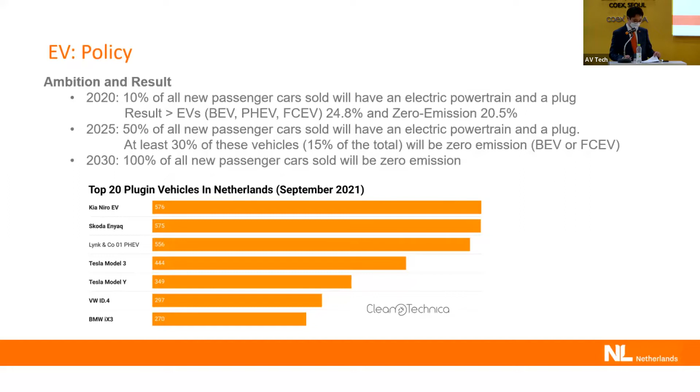네덜란드는 전기차 보급을 빠르게 늘리면서 산업도 발달하고 있습니다. 정부의 충전 인프라 확충이 국가적 중점 과제로 추진되면서 네덜란드는 지난해 말 전국 기준으로 6만 개 이상의 공공충전소와 15만 개 이상의 민간 충전소가 있어서 세계에서 단위 면적당 가장 많은 충전 인프라를 구축하고 있는 나라입니다. 이러한 노력은 점점 강화되고 있어서 작년에는 하루 평균 200개 정도의 충전소가 설치됐고 2030년까지 총 190만 개 충전소를 설치할 예정에 있습니다.

이 같은 적극적 투자를 바탕으로 해서 세계적인 충전 업체인 이위박스, 힐리옥스, 뉴모션 등의 충전기 제조업체들이 네덜란드에서 처음 설립되어서 성장하였습니다. 또한 다음 달에는 전기차를 ESS처럼 재생전기를 저장하고 다시 충전 시에 인센티브로 차량 보유자에게 주는 V2G, Vehicle to Grid 사업을 세계 최초로 네덜란드에서 시작할 예정입니다. 사진에서 보이시는 현대 아이오닉 5로 해당 프로젝트를 시작할 예정이라고 합니다.

네덜란드가 자동차하고 잘 연관이 안 되실 텐데요. 사실 네덜란드의 전기차 산업을 보시게 되면 먼저 테슬라의 유럽 조립 공장이 네덜란드에 위치해 있습니다. 그리고 유럽 내에서 한 16% 정도의 마켓 쉐어를 갖고 있는 트럭 업체 다프 트럭, 그리고 소형 버스에서 한 20% 정도 마켓 쉐어를 갖고 있는 VDL 등의 OEM이 이미 네덜란드에 있습니다. 그리고 여기서 중요한 것은 디젤 엔진, 유로 6 엔진들을 네덜란드에서 직접 생산을 하고 있다는 겁니다. 그래서 그런 강점을 갖고 있는 OEM들이 이미 네덜란드에 위치해 있습니다.

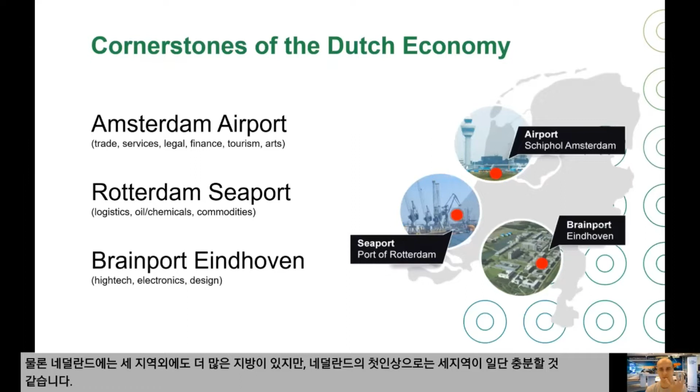As a third main port in the Netherlands, one of the economic hearts of our country, is Brainport Eindhoven, where high tech and electronics are developed - a real hardware focus together with software and developing high tech equipment, processes, and new technologies. So these are, in overview, the three main economic hearts and clusters in the Netherlands, but there's more in other regions - this gives a good first impression.

Important factors for this economy are companies like Philips and DAF that have invested in research and development from an early stage onward, creating a lot of spin-offs, many well known, like ASML leading in semiconductor equipment and supplying to Samsung in Korea, but also NXP making and designing chips themselves, and many other companies developing complex, low volume, high tech technologies. Next to these OEMs there is a strong supplier network that cooperates a lot with each other, which is really the Dutch way - to be open and social and cooperate easily.

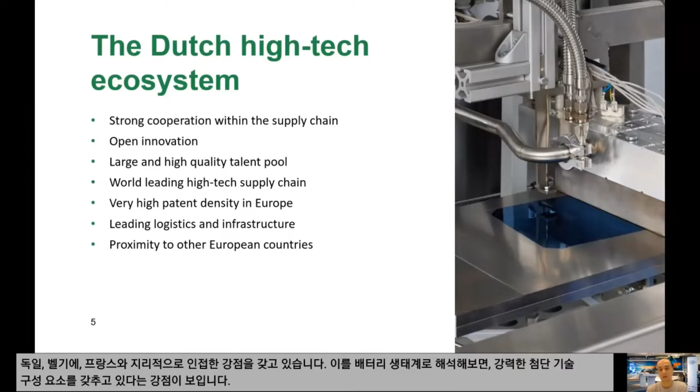To summarize, the Dutch ecosystem is high-tech focused, hardware and software in combination. We have an open innovation culture with strong cooperation in the supply chain, and also a leading tech talent pool with a very high patent density in Europe - we're really leading on that facet as well. We have a strong logistics infrastructure and competences, which is also beneficial with regards to our geographic proximity to Germany, Belgium, France, etc.

Translating this to the battery ecosystem, this strong high-tech component is reflected in what we do in the battery value chain, which on one hand is making end products that batteries are integrated in, like trucks, buses, and boats, and on the other hand developing new improved electronic and cell technologies, materials, and production equipment.

This is divided across several regions. In the west of the Netherlands we have a strong hub in the maritime sector, but also more heavy industry, as indicated earlier with Rotterdam, where recycling and material development takes place. There's also a strong research center at the Technical University of Delft on cathodes and solid-state electrolytes, with spin-offs coming from there.

More in the east of the Netherlands, we have a stationary energy storage cluster, where bigger stationary batteries are developed, and also a very strong research group on next generation battery cells. And not to forget, safety and test facilities are very present here, with a lot of test facilities and also safety and certification activities.

More towards the south of the Netherlands, we have the high-tech hub in Brainport Eindhoven, as mentioned earlier. This is in combination with a strong automotive industry, with DAF and VDL developing buses and trucks, but also a startup like LeydenJar present there, combined with thin film engineering for electronics and production equipment.

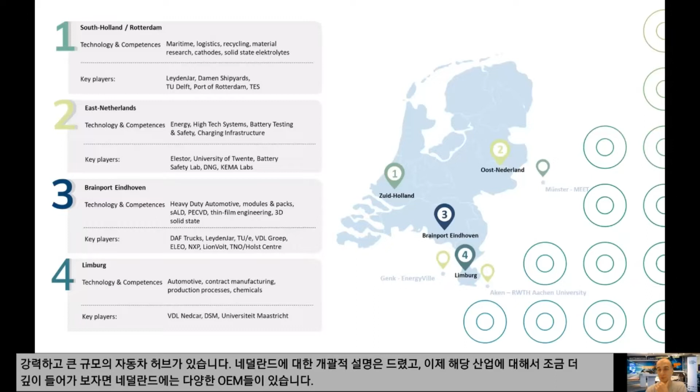So that gives you an overview of the Netherlands, but when we go a bit more into depth, we see that especially on the heavy duty segments, we have a lot of OEMs, developers of the end products, for example VDL, DAF, and Damen, but also Spierings mobile cranes, developing mobile cranes, and even a leader in Europe with regards to electric mobile cranes.

So this is a focus also of the Dutch way of developing batteries, focused on these specific applications. And we're also a leader in inland maritime solutions, so that comes in well in making the transition from combustion engines to electric solutions.

If you then look at our supply chain of battery technology, we see that there's no large-scale lithium-ion gigafactories, not as in the other countries in Europe, but we focus really on new and improved battery technology.

Both on the materials, as you see with silicon anodes and lithium sulfur being developed by companies like E-magy and LeydenJar, as well as a totally new structure of the cell with Lionvolt developing a 3D structure for solid state cells, which is really unique.

And then we have also a strong set of production equipment and processes companies like SALDtech and SALD, but also Delft IMP will be presenting after me as well.

And these cooperate with a strong set of corporates. So it's not just the startups, but it's a combination of corporate companies with strong leverage in the semiconductor industry mainly, together with a strong set of startups and scale-ups that have specific competences. And together we want to make sure that these scale.

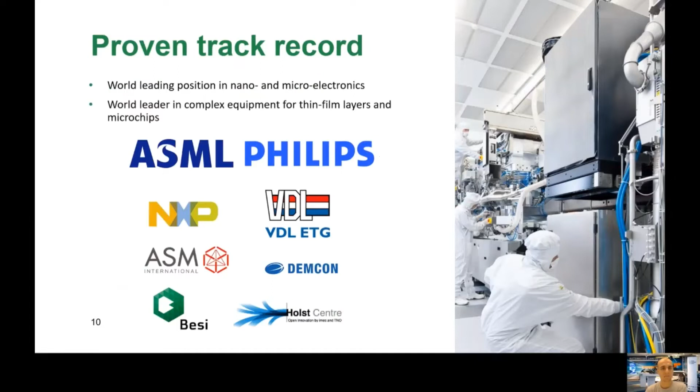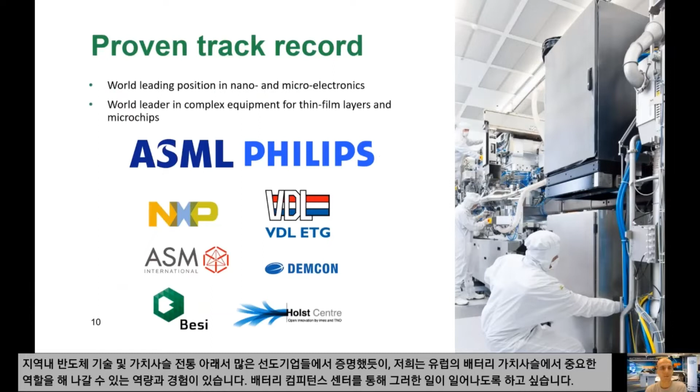As said, we believe that through the semiconductor heritage, where we have really leading players and a leading supply chain, we have the leverage and track record to play an important part in this battery value chain in Europe. And we want to make sure that happens through the Battery Competence Center.

The Battery Competence Center is an innovation program where companies, knowledge institutes, and the public side come together to develop the knowledge and competences needed to create this Dutch position in the battery value chain. We do that, for example, through business development, but also being a platform for all the companies, both national and international, to get access to this Dutch battery value chain.

So really facilitate the growth of the ecosystem, but also want to position the Dutch battery value chain as we're doing today. We do that focused on 3 themes. So this is our strategic focus of the Netherlands.

So here we have battery systems. We want to make sure that we develop and produce the modules and packs in the Netherlands for these specific applications as shown before. So really niche and heavy duty focus. That's different than other countries where the focus is on personal vehicles.

We do that in a circular way, of course, and we want to make sure that we have the startups and companies that make new materials and equipment ready for scaling in the future. And then we can integrate these 3 and we have a real integrated successful value chain in the Netherlands, which is quite unique.

Well, what are we looking for with regards to collaborations? We're really looking to connect to cell suppliers, but also innovative battery companies to collaborate with us on these 3 themes, right? So module and pack development and getting access to the best cells for that.

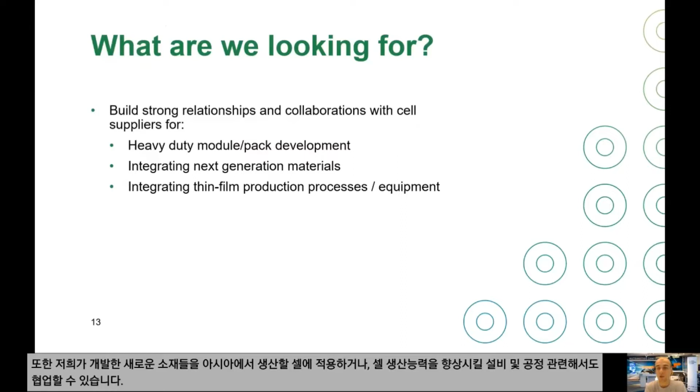But also integrating our new materials in the cells that are developed in Korea or in Asia, and also working together on developing production equipment that can improve the production of these cells.

So key takeaways, this is a summary. We're an OEM neutral country where we don't have a leading big OEM in the automotive industry, so that's also beneficial towards being located here as a company. We're a front runner in e-mobility and applying those, especially in the heavy duty segment.

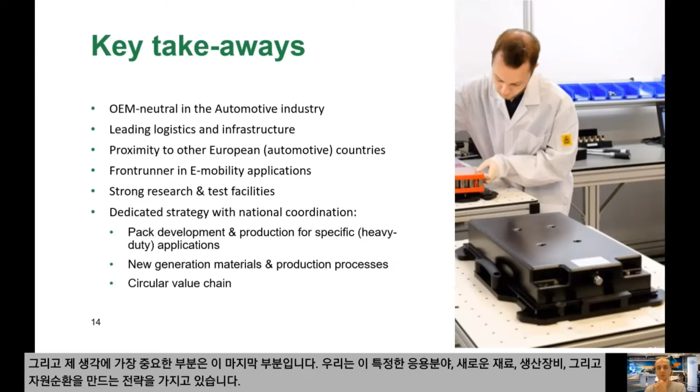But I think the most important part is this last bullet where we have the strategy, Dutch ecosystem, really on the specific applications, on new materials and on production equipment, and of course doing that in a new circular way.

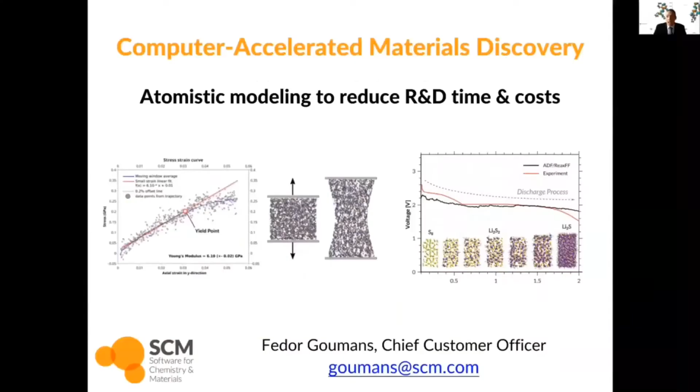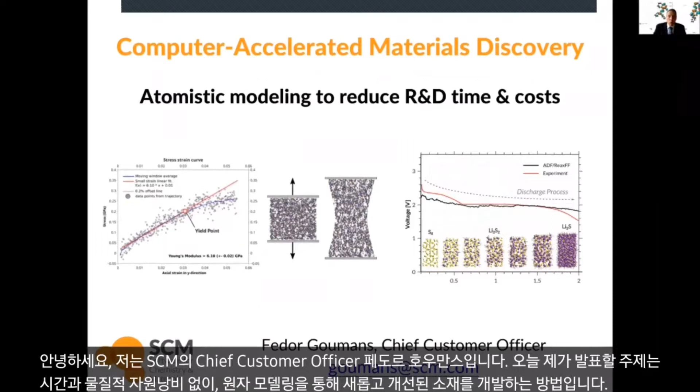Let's talk about how atomistic modeling can help you develop new and improved materials more quickly without using as much wasteful resources. Materials modeling is a proven method to help you understand and predict materials properties, screening many different types of materials before going to the lab and focusing only on the materials that have the most promise for the properties you're interested in. We can do that for many different types of materials because ultimately we can simulate material properties at the atomistic level, helping us predict, understand, and improve material properties.

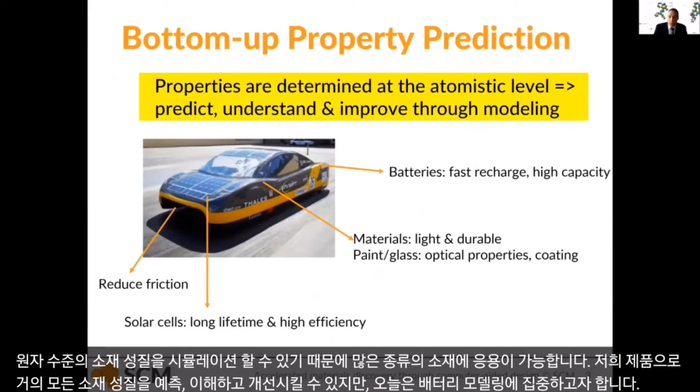But let's focus on battery modeling here. Our company, Software for Chemistry and Materials, is based out of Amsterdam. We've been around for 25 years. Originally, the software was developed as a pragmatic tool to understand inorganic chemistry with a particular application to catalysis. But this can be applied to many different problems, including batteries.

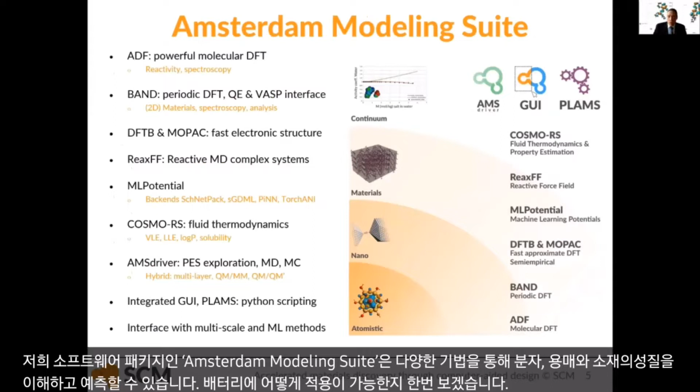Our software package, the Amsterdam Modeling Suite, has a range of different methods that allow you to understand and predict properties of molecules, solutions, and materials. Let's see what can be done for batteries.

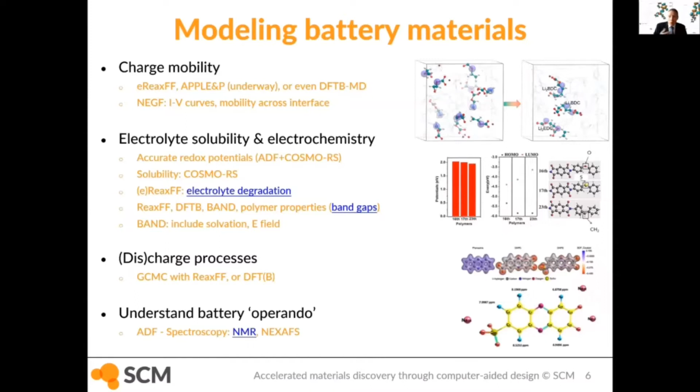We can calculate charge mobilities, diffusivities, redox potentials, and we can also look at what's happening in the battery under operation mode, what happens during discharge processes, when we charge the battery. Maybe we want to quickly screen many different types of electrodes and see which one has the best properties for a battery stack. Maybe you can also look at what is happening at the electrolyte interface and understand the processes there to get a better understanding of how we can get the best battery under operating conditions.

Some groups also use the software just to get a better understanding of what is happening in the battery by matching experimental observations, typically spectroscopic techniques like NMR and X-ray absorption spectra. So we can see the battery during operation and understand the interactions taking place, which again can help you develop better battery stacks.

So there's a few examples here where people have been looking at redox potentials and NMR spectra, as I mentioned, that gave researchers, in this case at PNNL, an American government lab, better insight into how to make aqueous redox flow batteries. And some of these materials now have been patented.

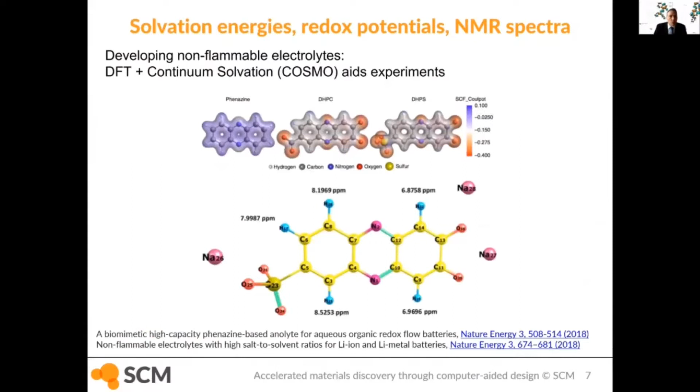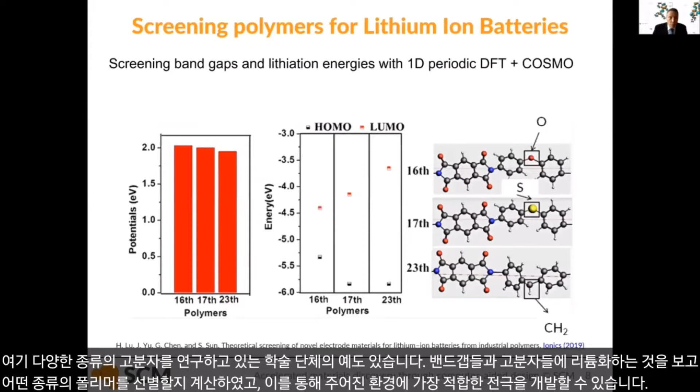But let's look more deeply into the battery itself. Of course, we're interested in what's happening during discharge processes. For simple lithium batteries, for instance, we can look at lithium discharge processes during operation, and we can understand why, at high discharge velocities, the lithium ions can start to attack the electrolyte, leading to unwanted breakdown and perhaps even buildup of gases.

In this particular study from some 7 years ago, they found out that if you put in a layer of Teflon, which is an inert material, the lithium ion, as soon as it leaves the anode, will collide with it and slow down just enough that it will not really decompose the electrolyte anymore, but still fast enough that ion mobility remains high enough for good conductivity.

Similarly, you can look at the processes at the electrolyte interface and see how the solid electrolyte interface is being formed during the first discharge processes.

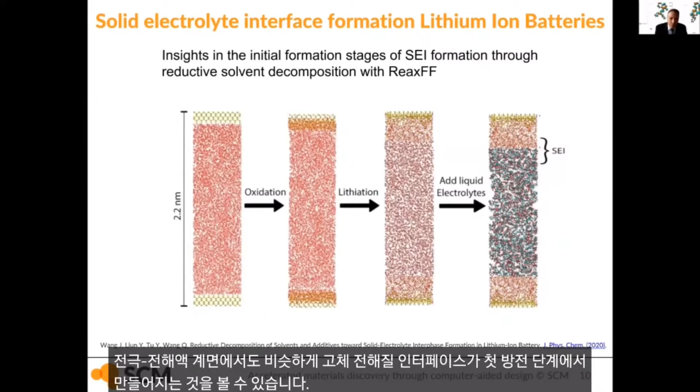We can also look at how, in this case, the cathode expands for a lithium sulfur battery. So when we go all the way from a fully charged to a fully discharged battery, we can see what is happening during the lithiation process, see how the cathode expands, and that helps us to take good care that we design a battery that can account for this expansion without breaking the material.

So let's see if we have a little video that demonstrates what's happening there. We can see as the battery starts to discharge, we get more lithium ions in our sulfur cathode. We get slow expansion, as you can see here, until eventually the battery is completely discharged, leading to a considerable expansion of around 10% in the sulfur cathode.

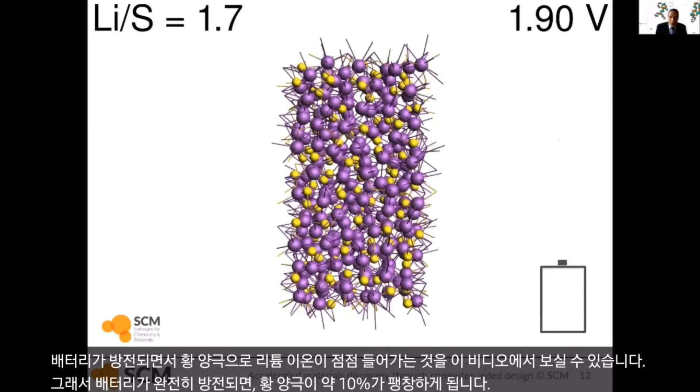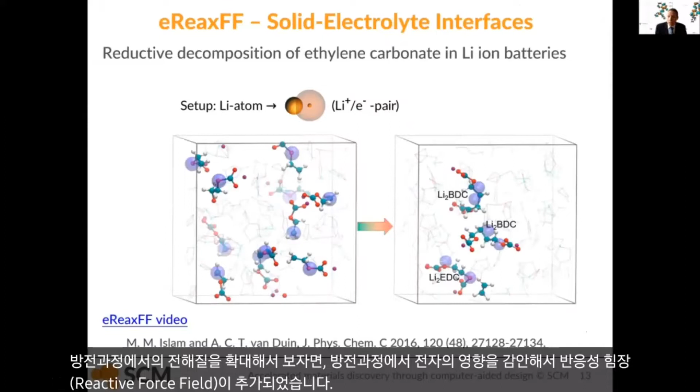Okay, so if we zoom in on the electrolyte during the discharge processes, electrons play a role as well. This has been recently added to a reactive force field, which can also take into account the effect of electrons during discharge processes.

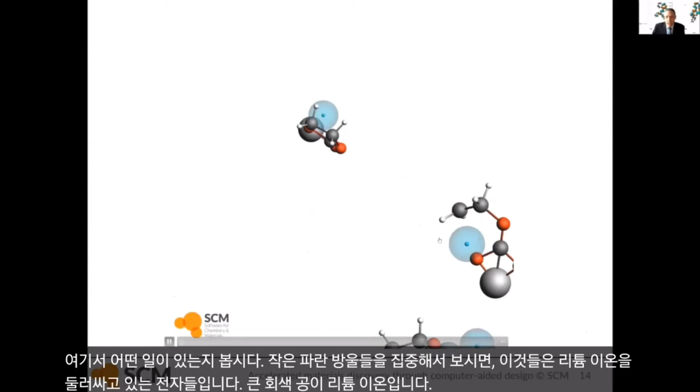Let's have a look at what's happening. We focus on these little blue blobs here - these are the electrons surrounding the lithium ion. This big gray ion here is the lithium ion. You can see that the electron in some cases can start to dissociate, in this case the carbon-carbon bond, carbon-oxygen bond in the ethylene carbonate, leading to dissociation of the electrolyte.

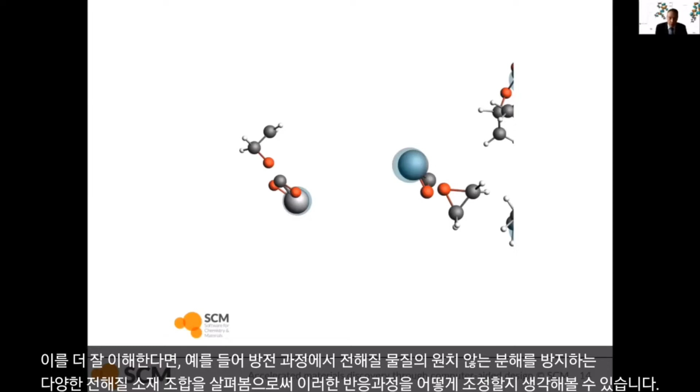So again, getting insight into the processes at the very small level, the atoms and the electrons. If you have a better understanding of that, you can think about how to steer those processes, for instance by looking at different electrolyte combinations that prevent unwanted breakup of the electrolyte materials during the discharge processes.

Ultimately, we want to go to larger scales, so we need to swap between these different scales. We have a collaboration with an American company, Wasatch Molecular, that developed polarizable force fields that allow you to study even larger systems of millions of atoms, and ultimately take that to the mesoscale using a coarse-grained approach. The polarizable force field is a proven way to get good diffusion and conductivity specifically for ionic systems, as they are in batteries. With that, we hope to get a larger view of the battery processes, going all the way from the atomistic to the mesoscale.

Finally, if we go all the way to the larger scale, we can do continuum modeling of fluids using a specific model, conductor-like screening model for realistic solvents, or COSMO-SAC, which stands for segment activity coefficients. This method can be used, for instance, to screen solubility.

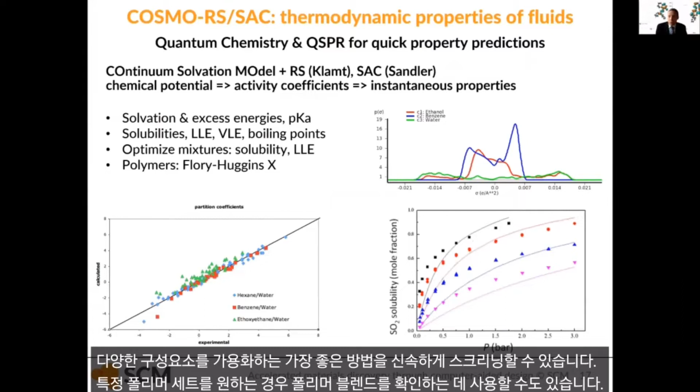So if we have a particular electrolyte and a particular set of co-solvents that we want to use, we can use this method to quickly screen the best way to solubilize the different components by using adjuncts as well. It can also be used to look at polymer blends in case you want a particular set of polymers.

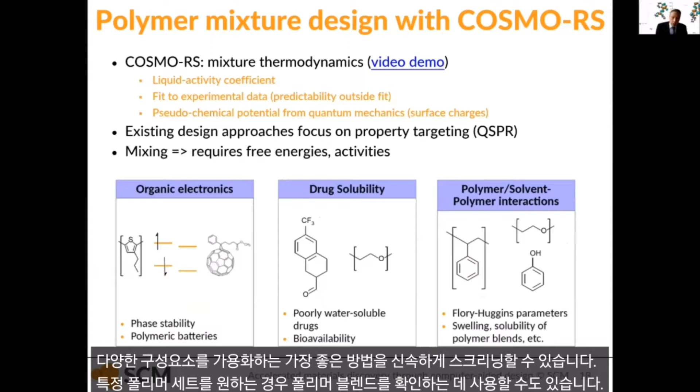And finally, let's talk about how we can take this even further by incorporating machine learning. Experiments are very expensive. Quantum chemistry or MD simulations are less expensive, but still sizable in terms of time and costs. Then there are machine learning techniques, which once we have a model, are really fast and quick, so we can screen many different types of compounds.

However, typically this is not accurate enough, or it takes months or even years to train these types of models. So in a new collaboration with Kebotix, an American-based company, we're going to combine their expertise in machine learning and deep learning techniques, their expertise in employing robotics to take into account experimental results, and our quantum chemistry and molecular dynamics expertise.

By using those combined expertise, our aim is to get to screening at a reasonable level of accuracy, much higher than probabilistic machine learning techniques, getting the accuracy of quantum chemistry, but now being able to screen millions of compounds. This is going to completely make it feasible to screen many different types of compounds at a reasonable cost before going to the experiments.

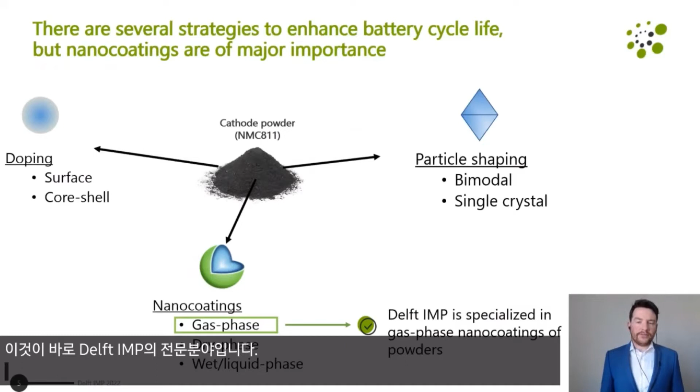They compared the impact on cycle life for the different coating methods. Among those, gas phase coating showed the best enhancement in terms of cycle life.

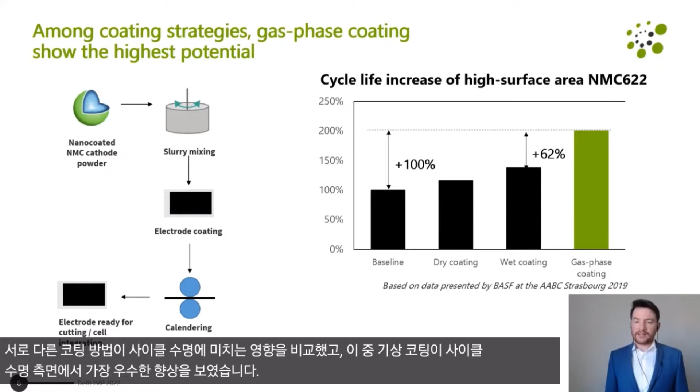During each cycle, you introduce a molecule from the gas phase that can only react once with the surface. The excess gas gets removed and you introduce a second molecule that again reacts with the surface. By doing this, you have a very good control of the coating thickness. It allows you to coat the surface of complex structures such as powders.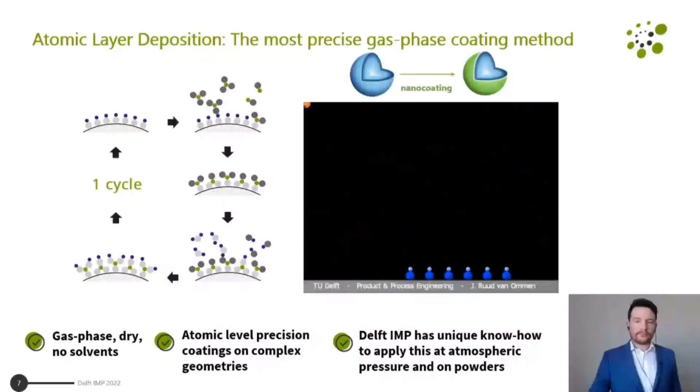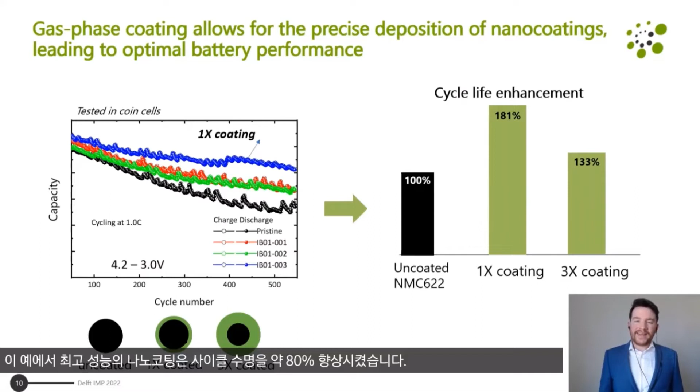Here, you can see an example where we can precisely control the thickness of the coating. By testing performance in coin cells, we can extract the optimal coating thickness. In this example, the best performing nanocoating led to about 80% increase in the cycle life.

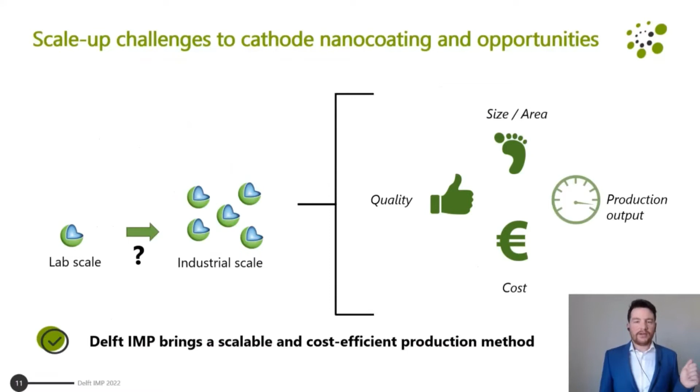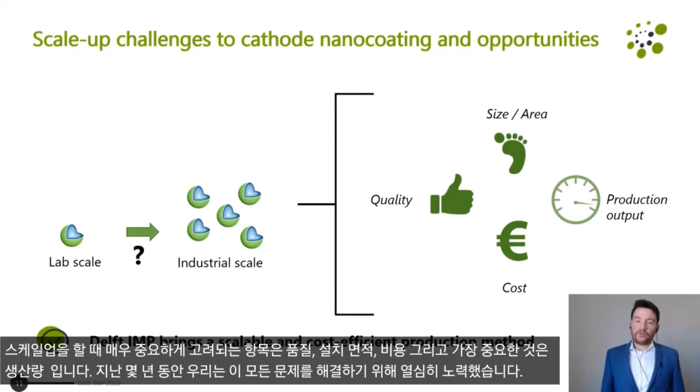I hope that in the previous slides I managed to convince you that gas phase nanocoatings have tremendous potential. The big question is, how can we produce this at an industrial scale? There are different aspects that become very important when scaling up, which is quality, area of the installation, cost, and of course production output. In the last couple of years, we have worked very hard to solve all these problems.

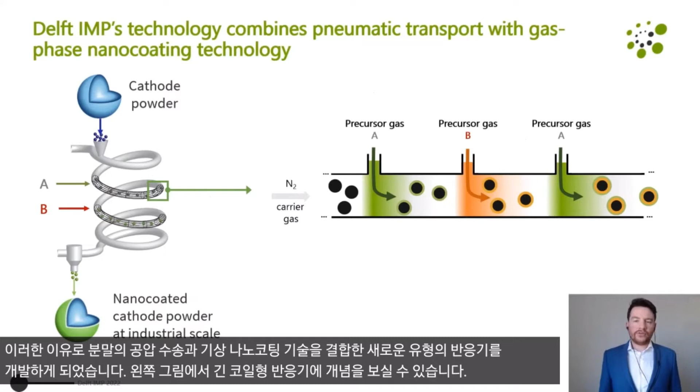For that reason, a new type of reactor was developed that combines pneumatic transport of powders with gas phase nanocoating technology. On the left, you can see the idea is based on a long and coiled reactor.

A powder gets injected from the top and flows through the reactor. While the powder flows through, it reaches different reaction zones. Each reaction zone will add a small amount of coating.

By controlling the size of the pipe, we can increase the production throughput. By controlling the length of the reactor, we can control the final thickness of the coating. This reactor concept is ideal for continuous production at industrial scale.

Using our reactor has several advantages. First, we have already shown that throughput up to 10 kg per hour is possible. Later this year, our reactor will be ready that can process up to 100 kg per hour of powder. This should be sufficient already for a pilot production line. It will be straightforward to further enhance the production capacity after that.

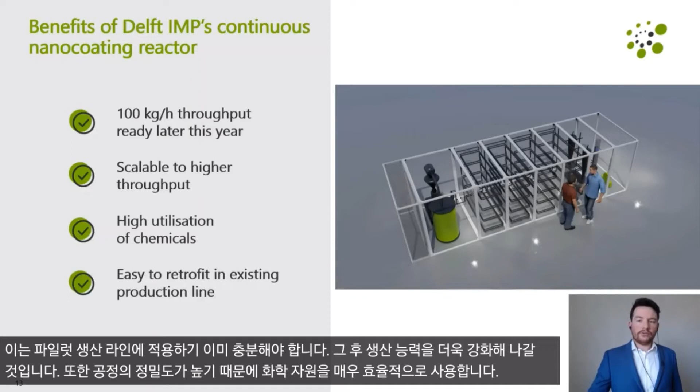Also, because of the high precision of the process, we are very efficient in the use of chemical resources. Finally, due to the relatively small size of the system, it could easily be retrofitted in existing production sites. Here you can find a 3D model of our 100 kg per hour system.

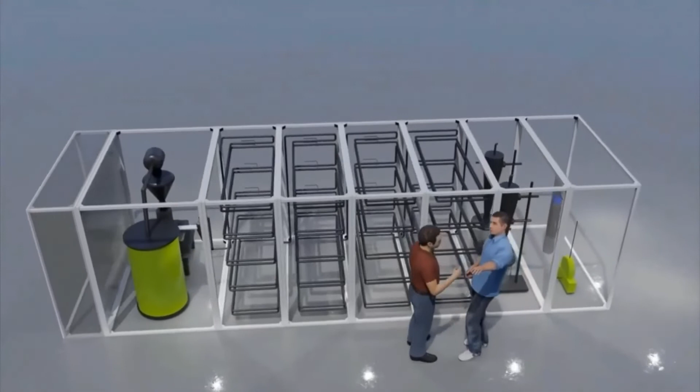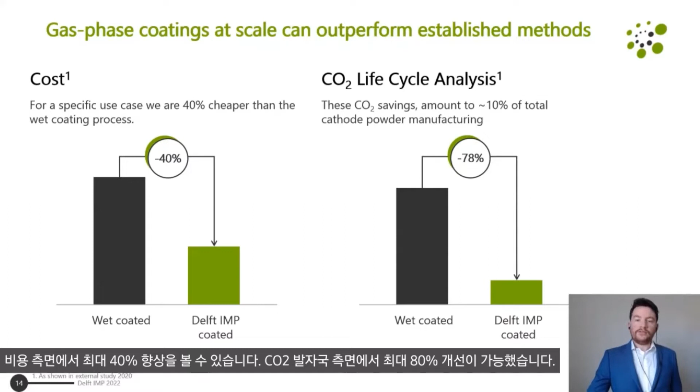In terms of cost, up to 40% enhancement in cost can be seen. In terms of CO2 footprint, even up to 80% was shown.

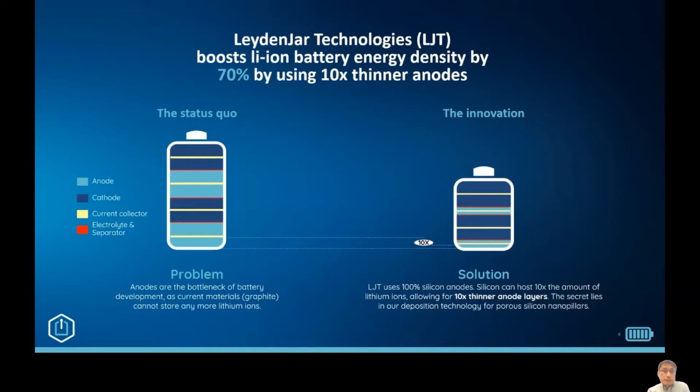현재는 캐파가 낮습니다만 현재 개발 중인 설비가 풀 가동한다면 연간 35메가와트/아워에 상당한 실리콘 음극을 생산할 수 있습니다. 갤럭시 S22 울트라가 용량이 5Ah인데, 35메가와트/아워는 S22 울트라 200만 대에 해당하는 양입니다.

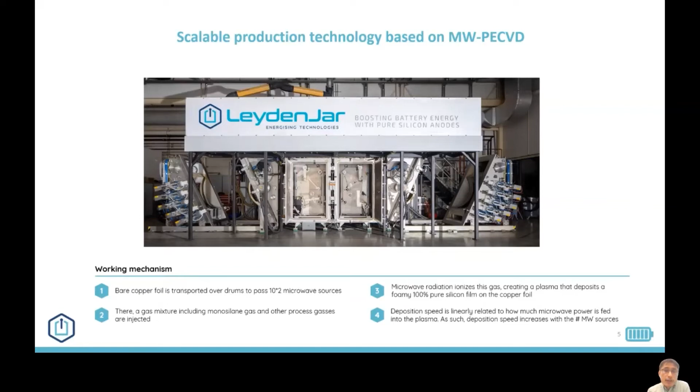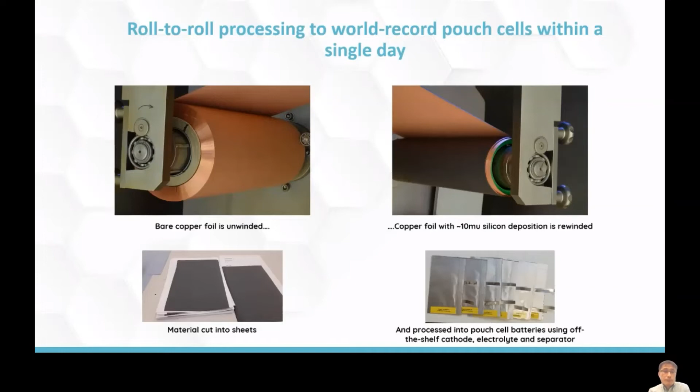저희 프로세스는 기존 음극 공정을 통째로 대체하는 공정입니다. 슬러리 믹싱, 슬러리 저장, 건조, 압연, 진공 건조가 저희 PECVD 공정으로 대체가 됩니다. 믹싱 공정은 가스 공급 설비로, 코팅·건조·압연은 증착 설비로 대체됩니다. 저희 공정 자체가 드라이 공정이고 진공에서 진행되기 때문에 별도의 진공 건조는 필요가 없습니다. 따라서 로지스틱이 극단적으로 간단해지고, 관리해야 하는 공정 조건이 두 손으로 셀 수 있을 수준으로 단순해집니다.

독일 P3 그룹에서 분석해 주신 바로는 연간 5GWh 생산 수준의 스케일에서 레이덴자 음극 제조가 마켓에서 요구하는 코스트를 맞출 수 있습니다. 참고로 2028년 마켓에서 음극 제조 공정에 원하는 코스트 수준은 킬로와트아워당 16유로로 전망된 기준입니다. 기본적으로 실리콘은 지구에서 구할 수 있는 가장 많은 양의 원소이고 저렴합니다.

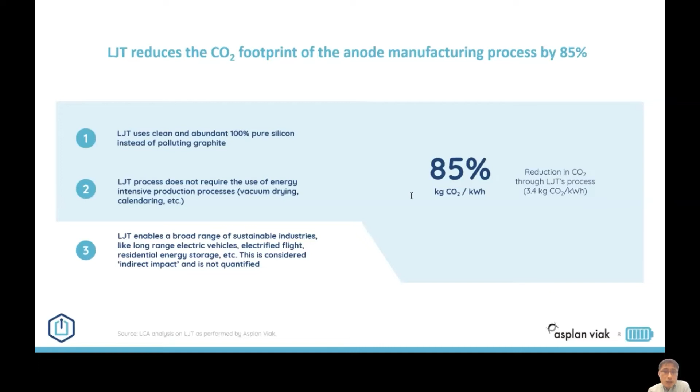마이닝부터 OEM까지의 서플라이 체인 중에 발생하는 부가적인 효과는 이 분석에 포함되어 있지 않습니다. 결과적으로 레이덴자 기술은 No Greenhouse Gas Emission이라는 인류 지상 목표에 가장 근접해 있는 기술입니다.

조금 전에 말씀드린 1350Wh/L는 NMC 622를 기준해서 얻어진 에너지 밀도이고요. NMC 811 혹은 더 고용량의 양극 사용, 실리콘의 로딩 증가, 실리콘 이용률 증가 등으로 1700Wh/L 이상으로 에너지 밀도를 더 증가시킬 수 있습니다. 이 1700Wh/L는 리튬 메탈 전지에서 얻을 수 있는 수준을 훨씬 상회하는 수준입니다.

이런 초고에너지 밀도보다는 향상된 배터리 수명을 더 원하신다는 피드백을 여러 고객사로부터 받아서, 초고에너지 밀도보다는 현재 수명 특성 향상에 더 전념하고 있습니다. 초고에너지 밀도에서 더 심각하게 우려되는 배터리 안전성 문제를 잘 인지하고 있고, 초에너지 밀도 달성 프로젝트에서는 안전성 강화 목적으로 All Solid State 배터리 개발을 진행할 계획이 있습니다.

레이덴자 테크놀로지 기술 현황과 전망입니다. 500사이클에 집중하고 있고, 현재 데이터 기반으로 말씀드리면 400사이클에 근접해 있습니다. 말씀드린 것처럼 초고에너지 밀도와 레이트 캐퍼빌리티는 계획보다 조금 늦게 진행되고 있습니다.

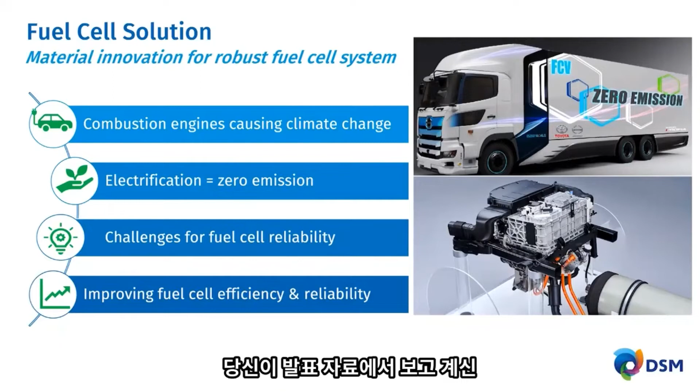I'm glad to say that the automotive industry does have one solution that will help, which is the electrification of the powertrain in transport. That means zero emission.

In general, there are two alternatives in powertrain electrification: the lithium-ion battery and the fuel cell. The fuel cell is an emerging technology, because it is a technology with minimum environmental impact.

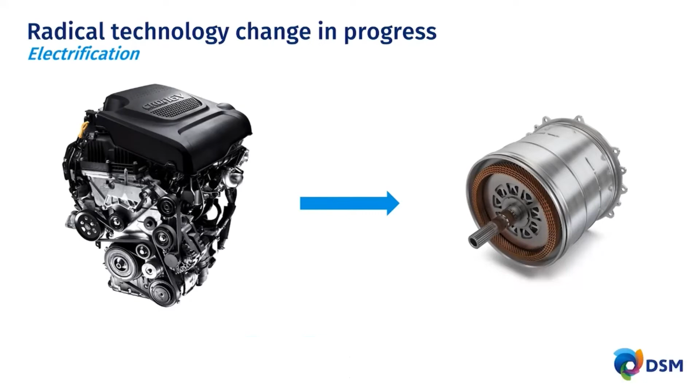So how does this promising technology work? The heart of the fuel cell is an electrochemical process, which combines hydrogen and oxygen and converts it into electricity.

and water. A catalyst and a membrane have to be applied to make the process happen.

The principle of the technology may sound simple, but in fact, it is a delicate technology, and its durability and efficiency can be easily and significantly jeopardized.

the fuel cell stack, which is the heart of the electricity generation.

In most of the time, the fuel cell system works between 70 to 90 degrees with almost 100% humidity at a pH value around 5.

Those conditions may sound moderate, but in reality, it is harsh enough for the material utilized to construct the fuel cell system.

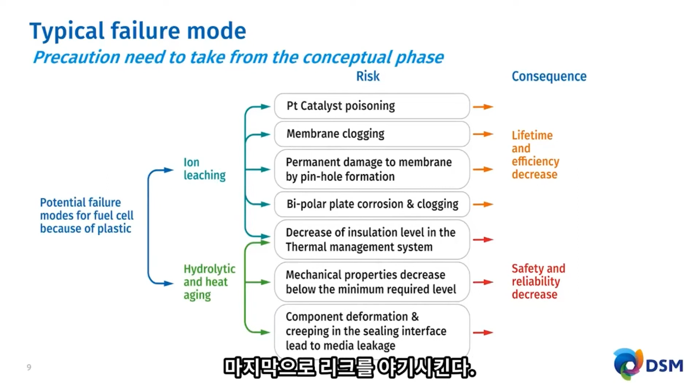with the platinum catalyst and form a masking layer which blocks the hydrogen from reacting.

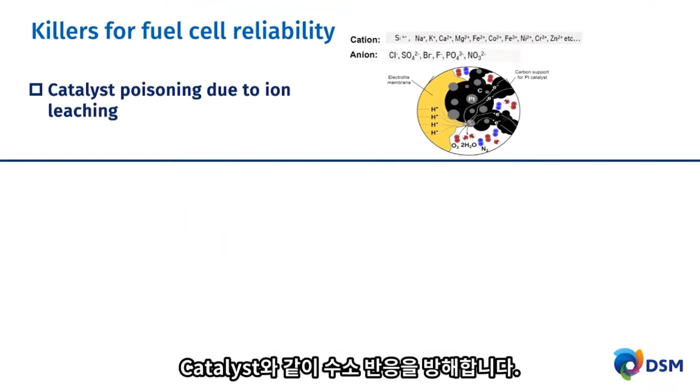And the second significant impact comes from the presence of ions, especially the cations, in the membrane.

It will cause membrane clogging, and also, in the worst case, it causes membrane degradation as pinhole formation.

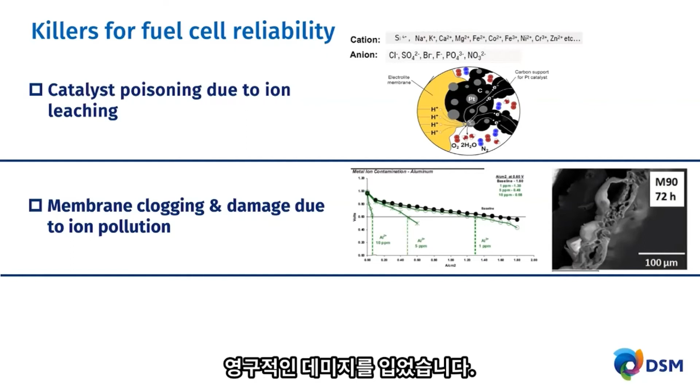The third, but not the last, significant impact is the degradation of the material in the hydrolytic environment, which causes part deformation, especially if the deformation happens in the sealing interface.

It causes medium leakage, which will lead to the fuel cell system functioning in the wrong way.

If those problems are not foreseen and solved in the design phase, the lifetime of the fuel cell engine is jeopardized. So our team has made a breakthrough technology which helps boost lifetime over 20,000 hours.

It is able to meet the most critical requirements in all kinds of transport forms.

Plastic compounds used to build the fuel cell engine will have to be loaded with additives, such as glass fiber, to meet the required strength.

It is similar to the steel bars we use in concrete to construct our houses.

As mentioned, the fuel cell works in a fully moisture-saturated condition and operates at 90 degrees. Such conditions are harsh enough to break the bonding of the glass fiber and the polymer matrix, which causes problems

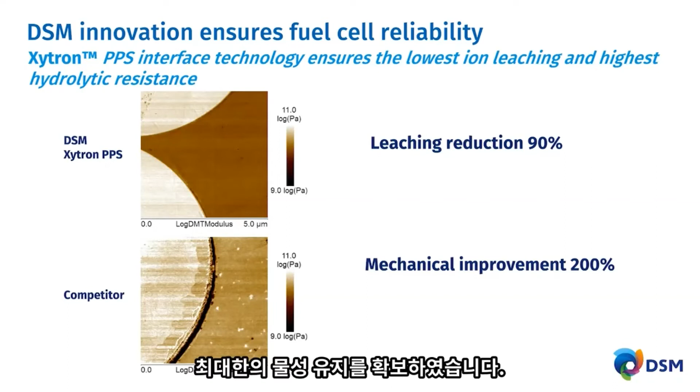As you can see from the picture below, we compare our innovative PPS material G4080HR with a standard PPS compound from our own lineup, and also a popular PPS compound in the industry. The specimens from those materials were soaked in 90 degree deionized water for 1,000 hours. After that, we measured the amount of absolute ions in the solution and also the conductivity of the solution. Our PPS compound Xytron G4080HR shows the lowest ion leaching and solution conductivity.

Moreover, we are not only able to minimize the ion leaching, but we are capable of identifying the source of the ion leaching and also the exact ion types.

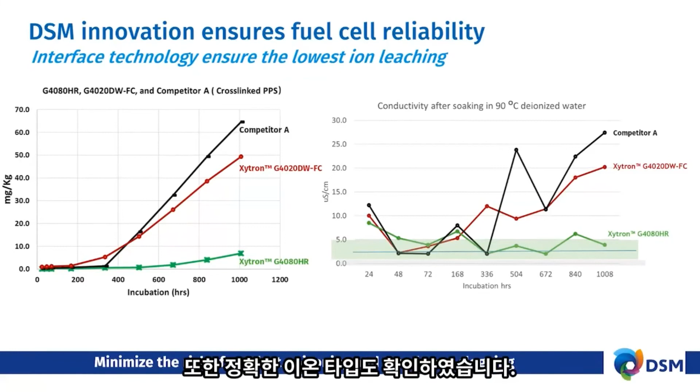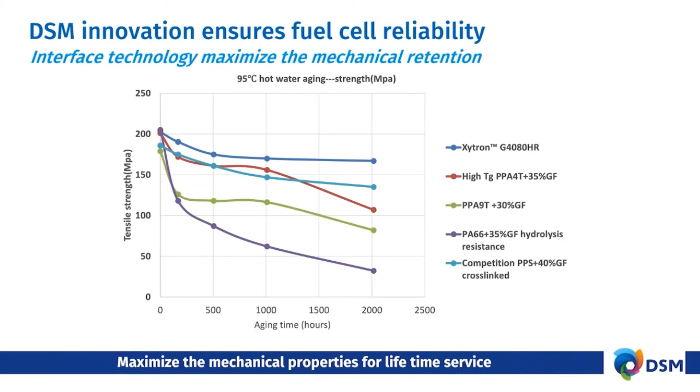The benefit of interface technology also helps maximize mechanical retention in hydrolytic environments. As you can see from the graph below, we took the most representative engineering materials potentially for fuel cell application, from hydrolysis resistant polyamide 66 to long chain PPA9T and high TG PPA, as well as PPS compound. Those materials were soaked in 95 degree hot water for long-term aging. Thanks to the interface technology, our product Xytron G4080HR is able to achieve maximum mechanical retention, far better than most of the engineering materials, which provides confidence to designers for a long-lasting fuel cell system.

Moreover, we are more than just a material supplier. We are a reliable business partner, providing strong technical support through the whole development cycle of your fuel cell system. Among all the capabilities we have, thanks to our scientific research capabilities, we are able to construct a mechanical prediction model which supports material mechanical prediction up to 30,000 hours in actual fuel cell working conditions.

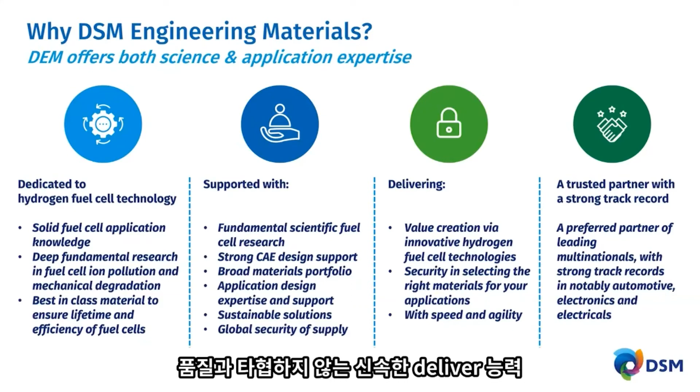DSM Engineering Materials is a reliable business partner. We offer the best science and application expertise, with concrete understanding of application combined with our science capabilities, to offer the best material to ensure lifetime and efficiency of fuel cells. With our strong engineering capabilities such as CAE, design, and manufacturing, we are able to support you from stage one. We have a global footprint and the agility to deliver on time without compromising quality. In short, we are a trustable partner to work with. Thank you for listening.

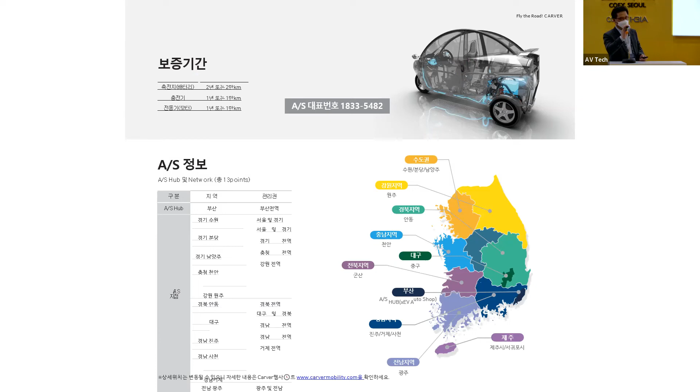예, 저희도 지금 AS망을 구축하고 있으며, 다음 주 환경부의 최종 보조금 발표에 따라 다음 주부터 출시가 가능하고 저희들이 국내 계약을 할 계획을 갖고 있습니다.

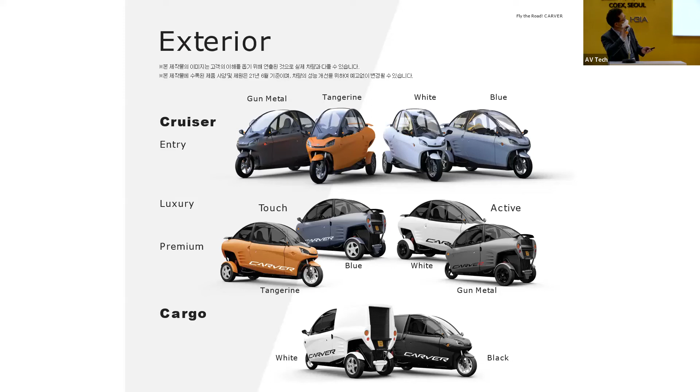저희들은 이제 크루저, 아까 2인승 크루저는 저희들 3가지 버전이 있습니다. 엔트리, 럭셔리, 프리미엄. 그래서 컬러별로 터치와 액티브로 구분을 하고 있고, 화물업 자영업자 소상공인을 위해서 카고 버전을 블랙과 화이트로 준비하고 있습니다.

예, 다양한 옵션과 색깔을 가지고 판매를 준비하고 있으며, 지금 가격대는 환경부 보조금이 다음 주에 최종 발표가 납니다. 부가세를 합치면 1,400만 원대에서 환경부 보조를 받게 되면 1,220 정도에 히터와 에어컨이 장착된 풀옵션을 구매할 수 있고, 로우 모델인 엔트리 같은 경우는 950만 원대에 소비자들이 구매하실 수 있습니다. 유럽은 거의 13,000에서 15,000유로이기 때문에 유럽보다는 상당히 경쟁력 있는 가격으로 국내 출시를 준비하고 있습니다.

예, 제원은 오토바이 폭이 980이고 길이가 2,900이기 때문에 좁은 길이라든가 주차에서 가장 용이하게 도심에서 즐길 수 있는 개인형 모빌리티입니다.

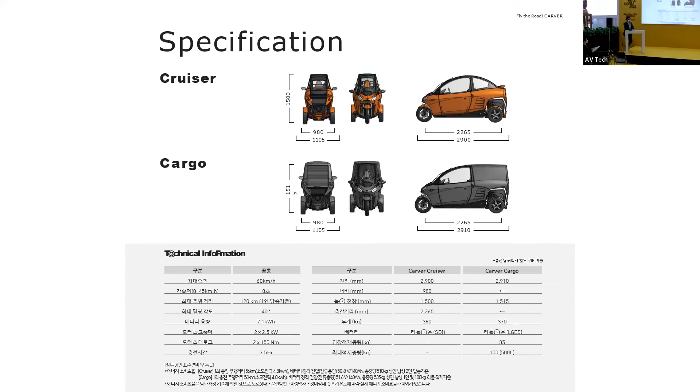테스트까지 마쳤는지 그것도 궁금합니다. 저희들이 배달 라이더들에게도 신경 쓰고 있는 부분은, 일단 비라든가 우천에는 저희들의 장점이 있고, 사실 눈에는 자동차도 오토바이도 상당히 약한 부분이 있습니다. 눈에 대해서는 전기차의 특성상 다소 약한 부분이 있고, 등판 능력도 국토부에서 20%까지 다 승인을 받았습니다. 그다음에 라이더분들이 제일 고민하시는 부분이 아마 충전과 거리일 겁니다.

네, 맞아요. 현재는 1충전에서 120km, 130km를 계획하고 있지만, 향후 교환형 배터리, 스와핑 배터리로 교체형이 들어가게 되면 충분히 계속 교체하면서 쓸 수 있습니다. 배달 라이더가 하루에 250~300km 주행하는 것을 알고 있는데, 하루에 2회 정도 교체를 하게 되면 충분히 경쟁력이 있지 않을까 생각하고 있습니다.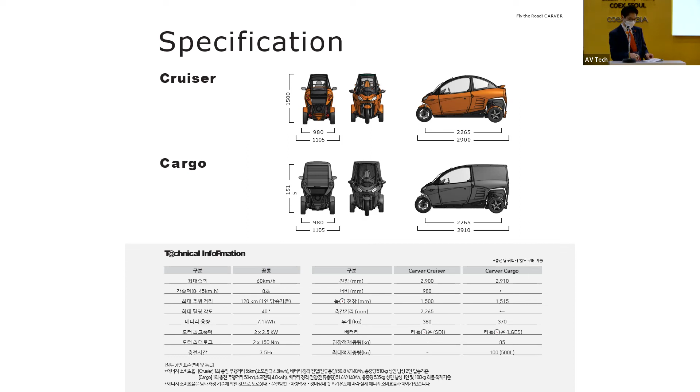Okay, to introduce, we are GreenCharge. We're a company working with EV Box from the Netherlands. We're based in Korea, and we started here about 3 years ago. 예, 저희는 그린차지라고 네덜란드의 EV 박스 한국 총대리점으로서 3년 전부터 EV 박스 한국 대리점을 대행하고 있습니다.

Our mission with GreenCharge is we vowed ourselves when we founded the company to be ahead of the revolution and to work on a future where it's zero emission free for our future children and grandchildren to live in a better and cleaner world. EV 박스와 저희 그린차지는 우리 아이들이 살기 좋은 지구를 만든다는 미션을 기반으로 설립되었고, 그린차지의 사업을 통해 EV 에볼루션과 자동차 배기가스가 없는 제로 에미션 미래를 만들겠다고 생각하고 있습니다.

So with our knowledge that we had in the Netherlands as being one of the founding countries to really focus on building the smart EV charging infrastructure on a nationwide level, as you could also see in some previous presentations, we bring that knowledge and some of our technology, including our software, here into the Korean market.